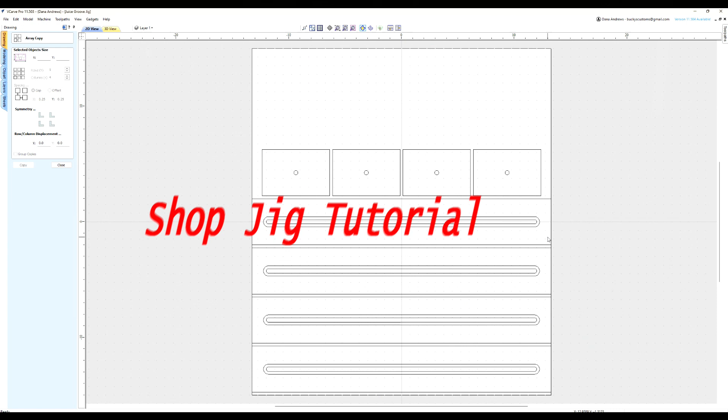So stay with us. Okay, I've got VCarve Pro open and the file for our juice groove cutter jig, and I'm not going to create another one. I'm just going to give you a few things that I did inside this jig, but the most important thing I wanted to show you was the toolpaths and how to do them. We're going to go through that.

But at any rate, I took a piece of plywood that I had already and I went to the setup and I made it 26.5 wide by 30. That's this dimension here is 26.5. This way is 30. And I use the datum in the center of the board. So everything that I start from is the center in this particular project.

And of course it's a little less than 3/4 of an inch thick, so I just made it 3/4 of an inch. Going to dig into the wasteboard, but so be it. So we'll click OK. Now, in order to create the identical pieces that I have here, I didn't just cut and copy and paste. I used the array tool.

I created one complete. Okay, so this time it should work. It did. So I made that, and then I went over here to the offset and layout, and I clicked the array and copy tool. And what I did was I just copied them down. I'm using an 1/8 inch bit, so I made them 1/4 of an inch apart. And I just set the gap for 1/4 of an inch and copied it down, and it made 4 of them for me. And that's how I did that.

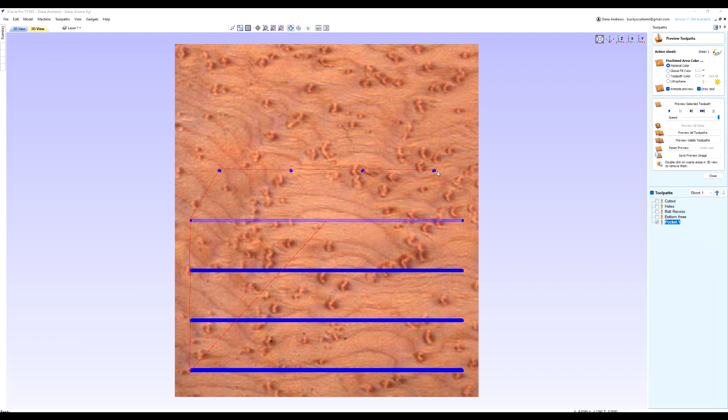You can see that we start at 0. We're going to go to 3/4 of an inch because I'm going to go right through the piece. We're going to use the end mill, which is 1/8 of an inch, and then we're going to call this one pocket 1 because I named everything else different, and calculate. And that's what it does. It goes through and it makes all those. We could preview it and you could see it made slots. Okay, so what it did was it made the slots and the holes.

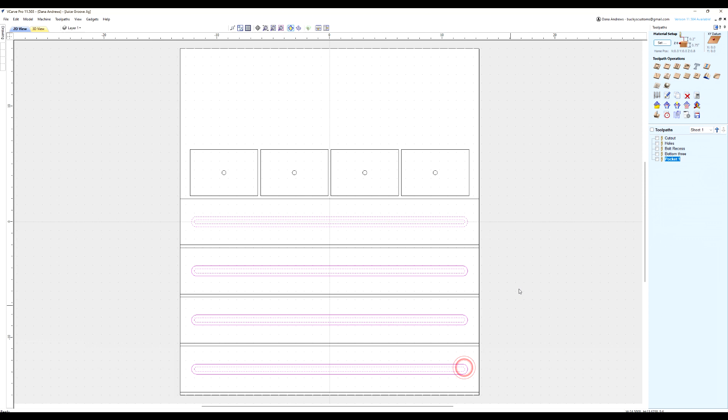Now what I want to do is I want to deselect that, and I want to select this outside one and hit the shift key and select all the outside ones, and then I'm going to select the inside one right there. Okay, then we're going to do a pocket or clearance between those two, and we're only going to go in 1/8 of an inch, and that's called pocket 2, and we'll calculate that.

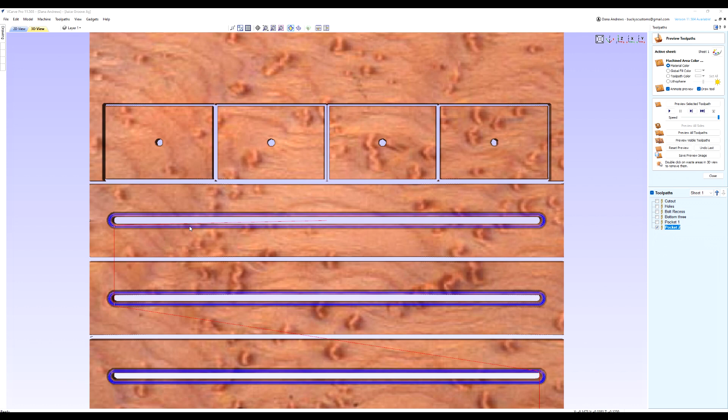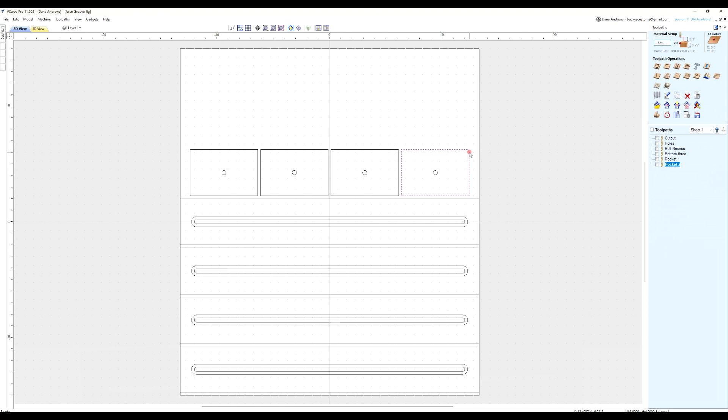And you can see what it does. It puts this groove, a little bit of a recess in here, and that's what that does. Now we'll close this, go back to our 2D view, and now we can do all of the outside perimeter, and we would select all those like this, hit the shift key, come right up, select all the perimeters, and you want to do a profile toolpath.

You want to select that, you want to go 3/4 of an inch. You do not want to make 25 passes. I'm going to edit the passes. Let's do 6 and see how it adjusts it. And we'll say set passes, okay. So now we're at 6 passes. They're going to make 1/8 inch deep each, and we're not going to use tabs because I'm going to hold it down in a different way. And then you want to calculate that, and there's your profile.

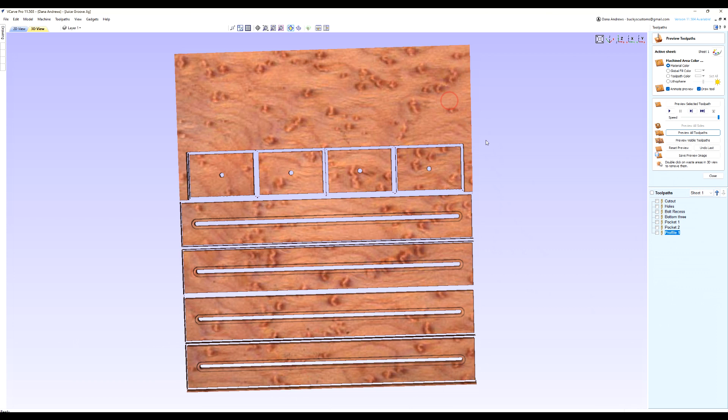So if we do all the passes and then we double click what we don't want, that's what's left, and our jig is made. So let's go over to the mill and we'll start carving this.

And it is magically clean. I'm not sure I put enough nails in this. Pretty sure I did. But they came up pretty easily. And they stay in the MDF, which is kind of nice.

We are to the point now where I could put some pocket holes in the back side of this, fasten it to the side here, and then we can put the bolts and washers through, and we got ourselves a jig. I'll show you how to use it.

Okay, so you noticed in the carving part I went over and I X'd one end, and that was because I'd noticed that it was kind of shifted one way, so I wanted to make sure that the end that got squared touched with the bit, because this end did not. So this end got squared.

This is the one that I'm going to put against for the corner. So this will be a perfectly square corner. This really doesn't matter. It's just going to hang out in the open, so should be good there. So what I'm going to do is I'm going to countersink. I've got a little countersink here.

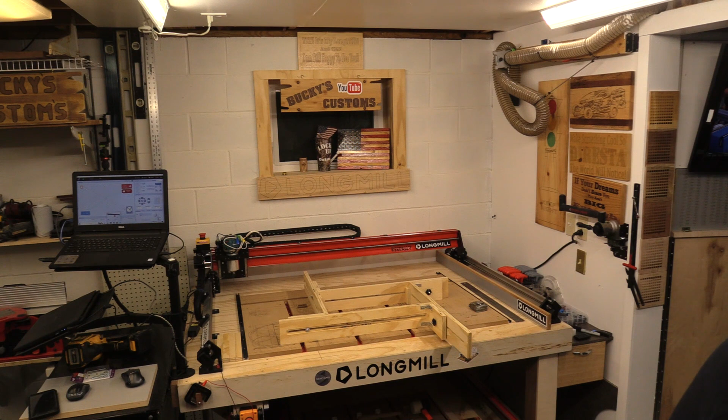We're going to do it close, and then once I have it close, I cut these spacers, and we'll put these in here just like that. Now you're timing this. This is how long this takes. Grab the cutting board, and we're going to set the cutting board in here and squeeze this right up against. Now, I don't need to make it so tight that you can drive a truck over it. I just need to make it tight so that I can measure it.

Ideally, you want your spacers to be a little bit shorter so that the board is down a little bit farther, but the whole thing will be squared once we use our ruler, and just by using the corner off of the jig, we can now find the exact center, mark it both ways, and then we would have the center of our board.

When somebody hands me a board and says, hey, I have this old board, I want to put a cutting groove in it, or a juice groove in it. Can you do that for me? Yeah, sure, I can do that. Get this jig off the wall, set it on the LongMill, put this in it, and I found the center. The other thing that I would do is I would have a positive stop here like I normally do, and that would be parallel to my x-axis.